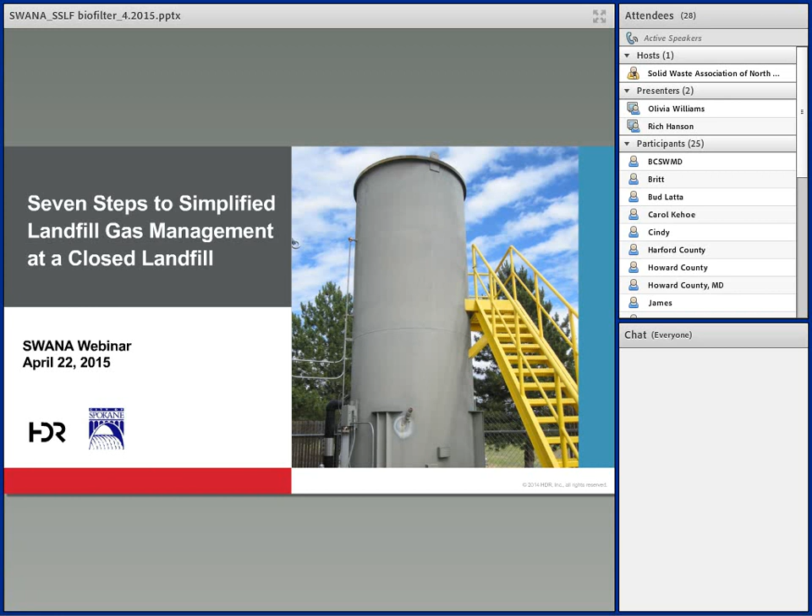Rich and I are going to be presenting to you on 7 steps to simplify landfill gas management at a closed landfill. So what we are going to be doing is walking you through what we call a step-by-step approach, which is just a fun way of kind of sharing a case study with you on the Spokane Southside landfill, which is a closed landfill site in eastern Washington.

So the steps that we're going to take you through today here, Rich is going to give you a bit of a background on the site itself and a project introduction. Then we'll take you through the 7 steps that you can see here on the screen. We started out with an overall audit, then get into some of the details of a landfill gas assessment and the landfill gas monitoring. We'll take you through the permitting and design process and then tell you about the upcoming construction and the follow-up monitoring. And then at the end, we'll spend a few minutes and talk with you about the project as a whole and some of the benefits that we feel that it provides.

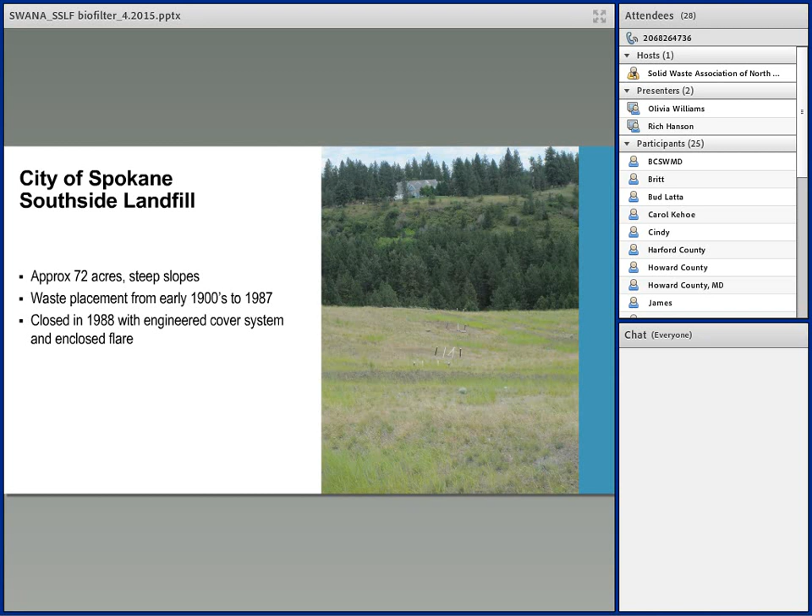Oh, I'm trying to change the slide here. Bottom left. Bottom left. There we go. Thank you so much. All right.

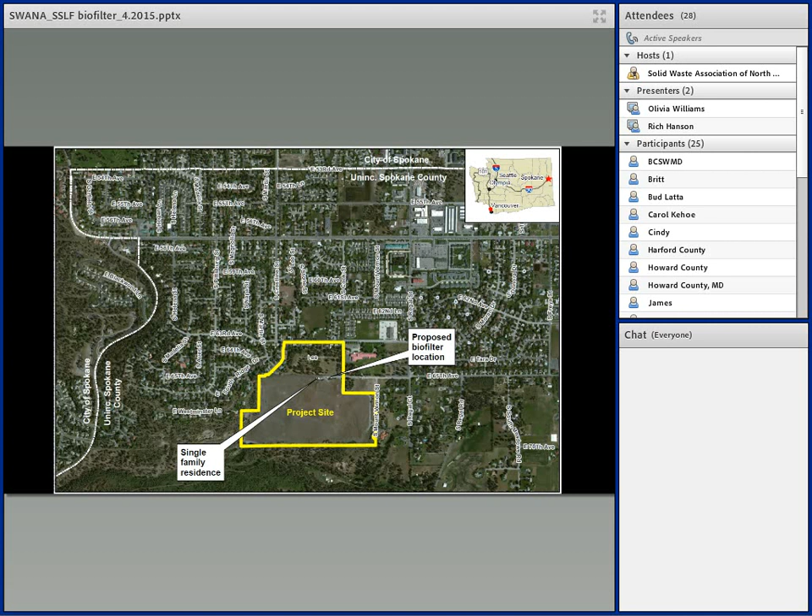The terrain slopes from the upper portion of the picture shown there to the lower portion. And as you get down to where the words project site are, it gets very steep on that end. And so it steeps down into a ditch that's way down back there. The groundwater flows from the upper right to the lower left, as the picture shows as well.

Some of the issues that I was trying to evaluate piecemeal-wise and what caused us to get into the audit included areas where we had large settlement areas that were causing flooded conditions in heavy rain and early spring with snow melt-off around some of the gas collection or gas monitoring points. And in addition, were causing excessive loads onto the cover itself.

The cover that was engineered and placed on here wasn't the type of cover that I see in other places where it's completely welded. This was kind of a slip cover that was supposed to account for the settlement, so they were overlapping, and as the settlement would occur, the membrane would slip across itself to continue that covering. So there's the thought that if we have this ponding occurring in those locations, we could get some surface water intrusion into the landfill. We don't have anything to substantiate that, but it's a possibility that exists out there.

Sags in the gas collection lines have produced blockage from condensate buildup at certain times of the year as well. That has caused the flare to shut down more often when we have heavy condensate being produced in the system. In addition, at the flare, we have a carbon monoxide problem. It's not out in the field.

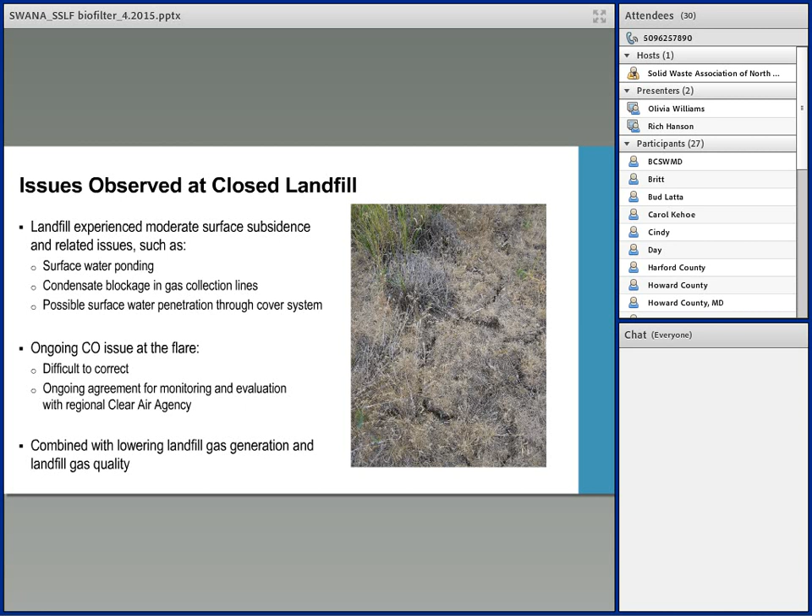And then in addition, it's almost 30 years, and the old school thought was that 30 years was just about it as far as where things would be in an old landfill for having to monitor and operate it. Now, as we get closer to that 30 years, we start to see that that's not necessarily the right solution. So we're starting to work with ways to show our regulators that we're operating in good faith and that we want to try to find some reasonable way to plan out the end of landfill life issues that are coming up for us and for so many others.

So back to the audit, we hired HDR engineers, and they proposed a systematic approach to help us to identify and evaluate the issues. We have 2 technicians that have been with us for a combined 25 years, so that's a lot of experience about handling, operating, maintaining these landfills. And so HDR came in, gathered data, just raw data, and then also interviewed the technicians to find out some other issues that were ongoing from their point of view. And HDR put that together, and Olivia will speak more to this as we go along.

But they put together a way for us to identify items that were in need of immediate repair, some things that could be put off for a few months, and then other things that were more long-term repair. They helped us to evaluate if those repairs could be done in-house or if we needed to bring a contractor in, and then put together preliminary budget ranges for each of those so that we could start to identify a budget item to do these repairs as we went along.

HDR, along the process, came to us and said, hey, we think that you ought to consider going to a biofilter here. It'll remove things like your carbon monoxide issue of having to operate the flare. It'll eliminate a lot of the weekly operation issues and reduce your annual operating costs. Those were all things that were very attractive for us to hear. And so we're very excited to do that. We went and did an addendum to the consultant contract, and they began to do that, and that's what brings us up to today.

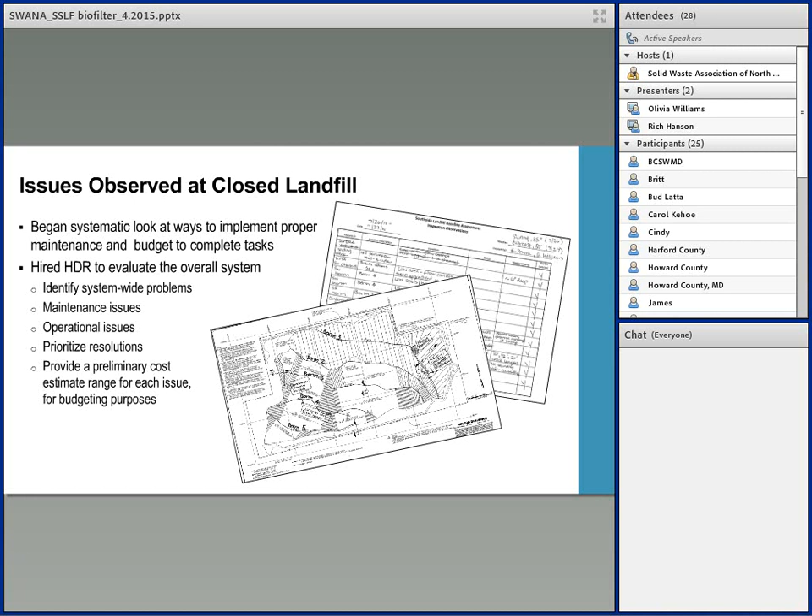So with that, I'm going to turn it back over to Olivia, who I'd just like to say I've had the great fortune of working with on this project since its inception, and so I'm just very thankful that I get to do this with you, Olivia. There you go. Oh, thank you. It's been great, and we'll keep it going.

So to provide a little bit more detail on the audit that Rich described, we joined the project in 2010, and what we're going to walk you through today is really sort of an overall 2-part project. Part 1 was the audit that Rich described, and then as we started honing in on some of these landfill gas issues, we really focused on that biofilter piece, which is the second part of the process.

So as Rich mentioned, step 1 that we recommend in working at an older landfill site like this, especially when you have changeovers in staff and some institutional knowledge that can be lost along the way, is really doing kind of a snapshot audit that gives you a good idea of what the existing conditions of the site are. And as Rich mentioned, that involves looking at the actual site itself, collecting data, but also really hearing from the operators because they are a critical piece of how that site has been maintained over the past number of years. And a lot of the anecdotal stories that you will hear, the data collection, the tweaks to operations and things like that, those can't be observed out in the field. So that's a really critical piece of the audit process.

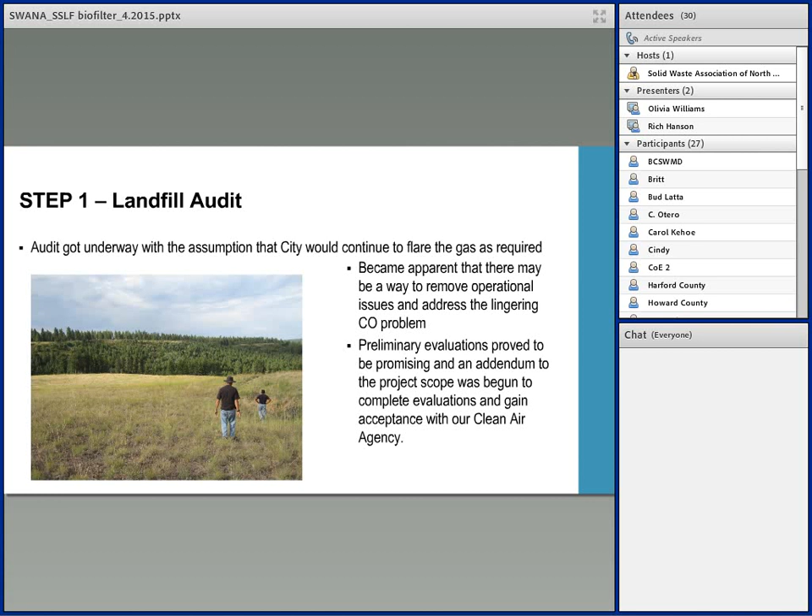So what we discovered as we were conducting this audit is that, as Rich hinted at, there were probably ways that we could look at to streamline landfill gas operations. And so of all the recommendations that we made as a result of the audit, the landfill gas pieces are really the ones that we honed in on. Before we start to focus on those, though, I just wanted to give you an idea of what the results of that audit process looked like, because again, that's really kind of the first piece in evaluating your site conditions.

Rich described some of the issues that had been observed at the site with the stormwater ponding and things like that. So we wanted to make sure that we had a good baseline documentation to work from so that we could come back to that at any point during this project and really recall what the challenges and the issues observed were.

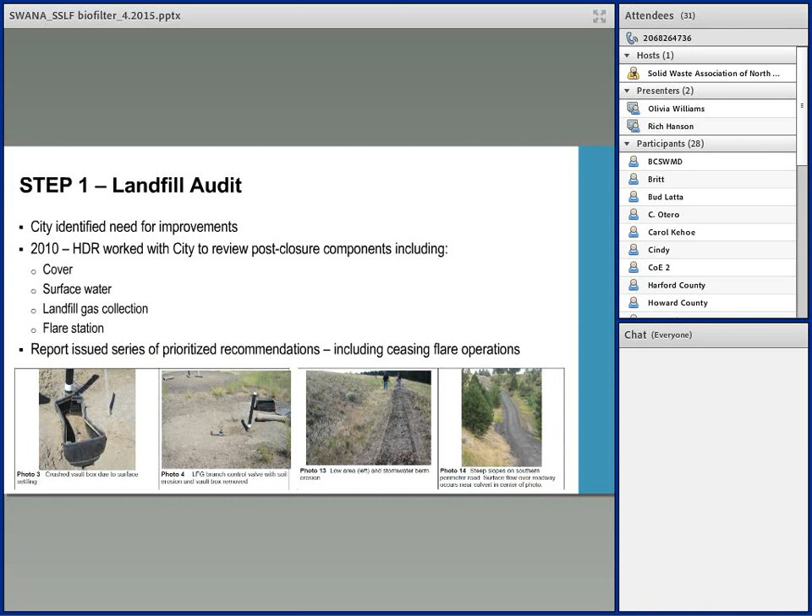So after that initial piece, as I mentioned, we really started to focus on the landfill gas elements in particular because that's where we saw a lot of room for improvements. And as Rich noted, a lot of opportunities for potential savings based on how the existing facility was being operated. So the existing flare is an enclosed flare, and it typically operates between about 450 and 550 cubic feet per minute. But as Rich noted, based on the age of the landfill and the declining quality of the landfill gas, that was becoming a very intermittent operation. So it was only operating between 3 and 5 days per week.

The low methane would cause the system to shut down, and then one of the operators would have to come from the other landfill site to check on that, to restart it, and to collect that monitoring data that Rich described. So in addition to the carbon monoxide that was observed as an issue at the flare, the landfill gas system, including the flare, was being monitored for your standard landfill gas parameters. So those included methane, carbon dioxide, oxygen, your balance gases, and then the overall landfill gas flow and the landfill gas temperature, so that you could keep an idea of the overall condition of the landfill itself as it continues to age.

And what we've shown in the bottom corner here is just a summary of the historical readings that are collected on a monthly basis. We've wrapped those up into an average over a 5-year monitoring period here. So you can see specifically for methane at a concentration of just under 25%. That's pretty low for landfill gas generation and for continuous flare operation. So you can see how some of the challenges that the city was encountering could be happening.

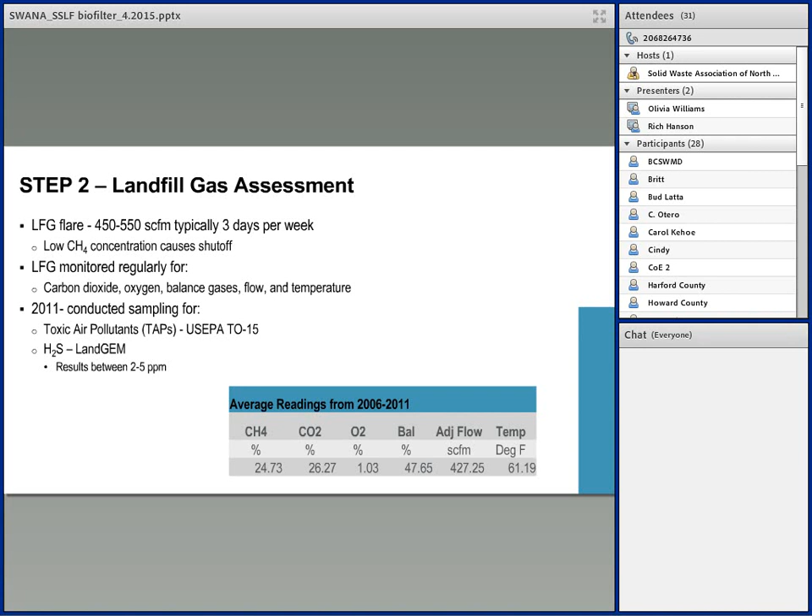Additionally, because hydrogen sulfide, or H2S, is a common odor contributing factor to landfill gas, we also conducted H2S sampling over about a 2-week period at the flare itself, and that was done just using a handheld monitor like you typically use for site landfill gas monitoring. So we observed H2S concentrations between 2 and 5 parts per million. So we conducted this background data in order to give us, as I mentioned, a baseline for how best to move forward with a potential landfill gas biofilter design.

So in order to get to the permitting stage, we knew that we'd need to do some landfill gas modeling with the data that we had collected. So we conducted some landfill gas modeling, and we compared those to the state of Washington air requirements. And so in the state of Washington, there's sort of a 2-stage threshold for air quality emission rates. And so those 2 stages are noted here. The SQERs, those are your small quantity emission rates, and that's sort of a snapshot benchmark. If your anticipated emissions are less than your SQERs, then you're good to go.

However, if you are higher than the SQERs, you can do some additional modeling to determine if the ASILs, or your acceptable source impact levels, will be exceeded. And if you can show that your ASILs will be met, then you are typically able to move forward with the project. However, if your ASILs are exceeded, that's when you need to go back and think about some additional air pollution controls that would help get you under those regulatory thresholds.

So based on the results of the landfill gas sampling that I described in 2011, we identified 2 key parameters that would be an issue for tracking and for permitting with respect to converting the flare to a biofilter. And those 2 major parameters were vinyl chloride, because that came back over the SQER levels, that initial threshold that I mentioned, based on the TO15 sampling, and then hydrogen sulfide that we monitored in the field.

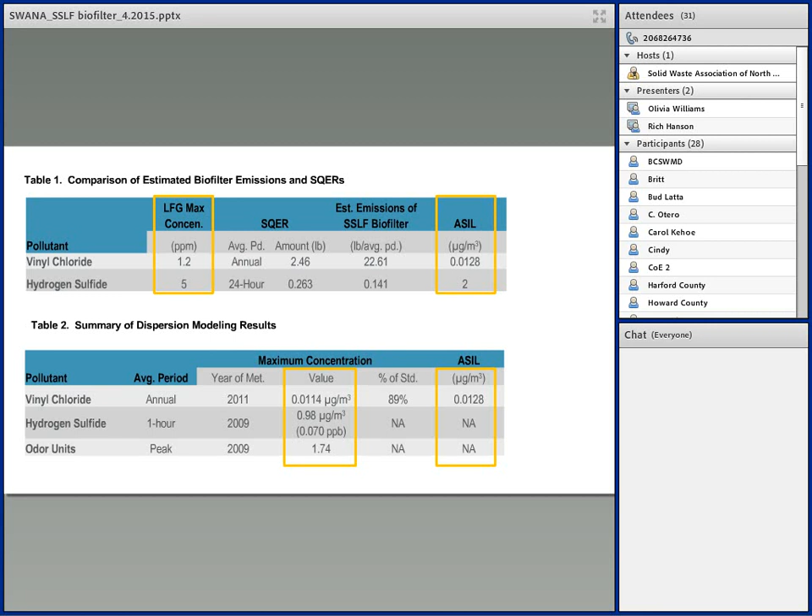However, because the concentration for vinyl chloride is now well under that ASIL threshold, we felt comfortable making the recommendation that this was an appropriate technology to use and that there would not be any adverse impacts based on modeling the vinyl chloride. Now, as I mentioned, we also wanted to consider odor when we were modeling this technology as well. And typically, minimum odor thresholds for an average human being to detect an odor are between 5 to 10 parts per billion, or what are called odor units.

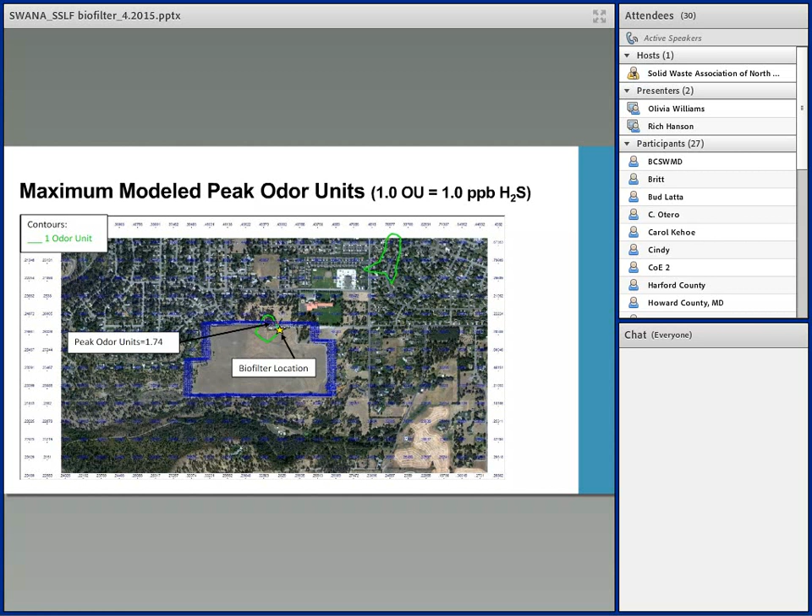So that got us through a major step in the design process. And moving on to the next piece, again, we were evaluating landfill gas collection and flaring as a whole comprehensive system. So we talked about the flaring piece. Now we wanted to take a closer look at how the site was monitored by the city.

So the existing landfill gas collection system at the Southside Landfill includes a series of internal wells and trenches for collection. That's piped to a landfill gas blower and then to the flare. And then additionally, for monitoring, there are a series of 68 landfill gas probes, primarily on the north side of the site. And those are grouped in collections or clusters of wells that are monitored at different depths so that you can see any landfill gas impacts in the different soil strata outside the landfill.

Additionally, a number of years ago, the city had a potential concern for some off-site migration of landfill gas, primarily on the northeast part of the landfill. So 22 extraction wells or vacuum wells were installed along the northern boundary of the landfill, outside the waste, but they essentially created a cutoff trench to collect any landfill gas before it migrated off-site.

That system operated for a while, and then when it was determined that it was no longer necessary, those extraction wells were shut down. But the city continued to monitor those just to make sure that they were doing their due diligence and observing any potential issues before they arose.

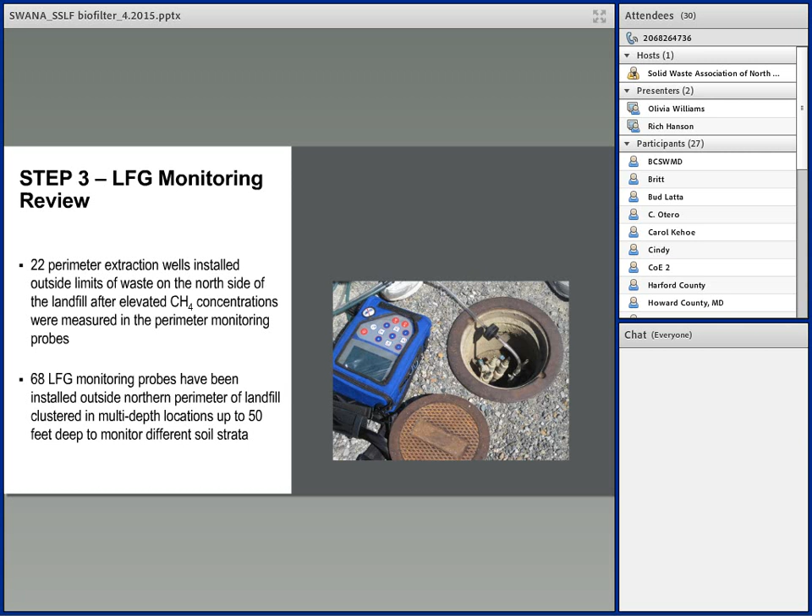So this was quite an effort for the landfill staff to go out and collect this data regularly, especially, as Rich noted, with folks coming from the north landfill site, to do this on a monthly basis was no small feat for the landfill operators. So what we did is we worked with the city to go back and we reviewed the permit conditions. And the permit conditions actually noted that the monitoring needed to be conducted no less than quarterly.

So as the previous landfill gas issue arose with the potential migration, the city had stepped up their monitoring and were doing that on a monthly basis. But after that issue was mitigated, the frequency was never reduced. So in reviewing the permit, we went back and noted the quarterly monitoring requirement, and we made the recommendation to the city essentially to reduce their frequency from monthly to quarterly. So you're going back from 12 monitoring events per year to 4, which could significantly reduce the amount of labor associated with your landfill gas monitoring requirements.

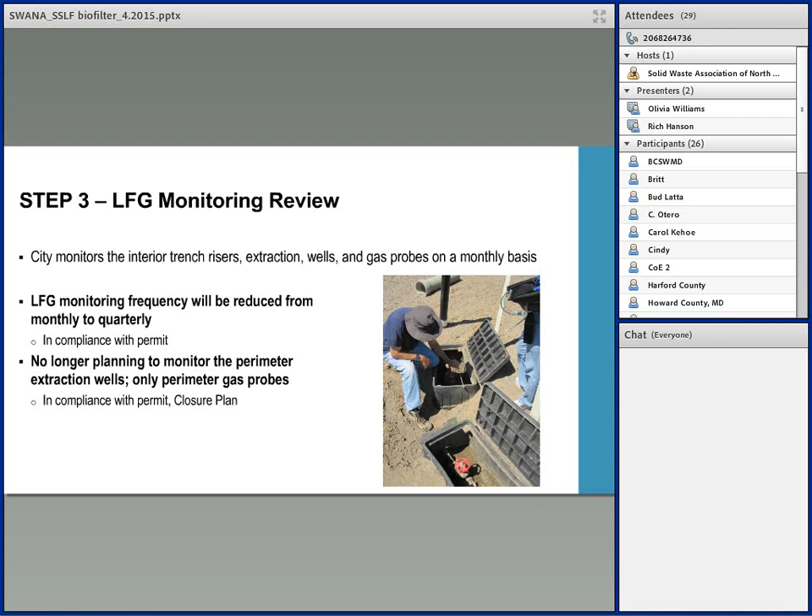Again, it was a good idea in doing the city's due diligence when that potential migration issue was occurring, but after that was mitigated, there was no real driver to go back and monitor those wells anymore, especially considering that monitoring was not their original purpose. So the combination of those two significantly reduces the amount of operator labor required to monitor the landfill and the landfill gas system each year. So we've provided notification letters to the Clean Air Agency. Again, because we were in compliance with permit conditions, we didn't ask permission, but we provided notification that the monitoring conditions at the site would be changing.

So the next step was the permitting process. And in the state of Washington, the local Clean Air Agency requires what's called a Notice of Construction, or an NOC. That's essentially the permit for any new air pollution control equipment. So similar to an industrial baghouse or to a scrubber, installing the flare, or now this proposed biofilter, is considered air pollution control equipment. So we needed to go through this permitting process to get approval to construct the biofilter.

Now, we walked through the technical process behind the biofilter with the Clean Air Agency, and fortunately, it was a process that they were familiar with because they had actually permitted a similar project in eastern Washington a couple of years before. So this one that we're working on for Spokane is the second one in the state.

The general thought, or the general technical process behind the biofilter, is that it's oxidation of landfill gas instead of thermal destruction of landfill gas, like the flare currently does. So the combination of the methane, the oxygen, and then the nutrients that's in the biofilter material breaks down the landfill gas into harmless constituents. So you get what's called a biomass, which is your biological result of the bacterial process, and then you break it down into carbon dioxide and water. So it's a fairly straightforward chemical process.

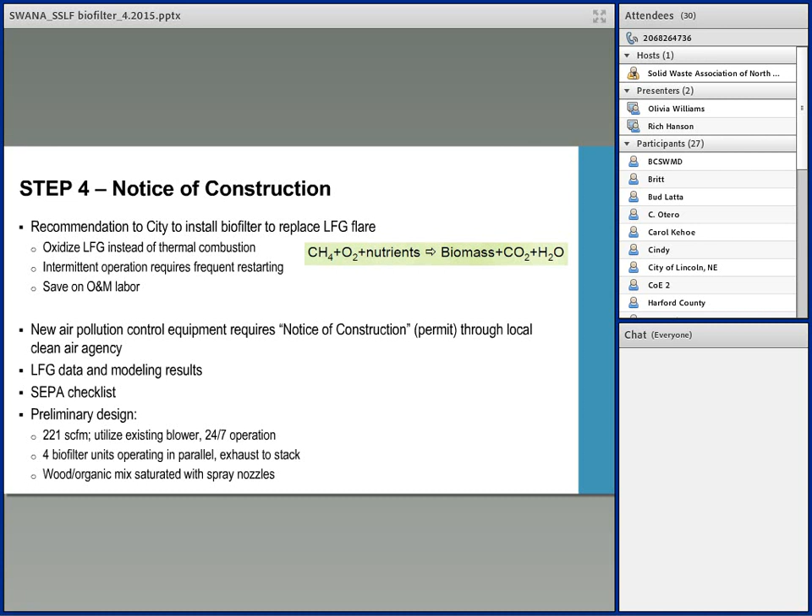The original vision was that we would have 4 modular biofilter units operating in parallel. That way, if you needed to replace the media in one, you could have one down while you're operating the other. But you still get the appropriate surface area needed to provide the biological treatment of the landfill gas. And then those 4 biofilter units would have the treated gas collected, and then they would exhaust to a stack, as I mentioned, for purposes of the landfill gas dispersion.

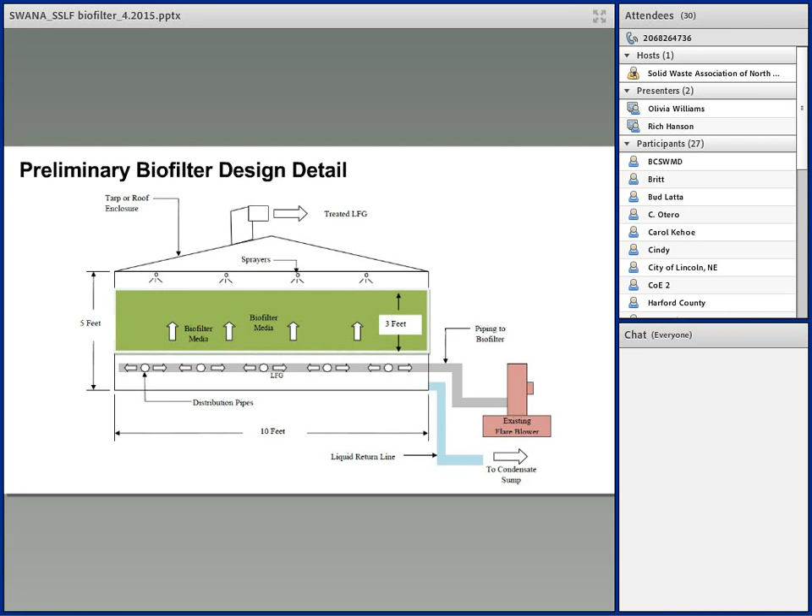So once we made it through the notice of construction process, we got approval from the Clean Air Agency to move forward with this project, and we started to delve into some of the design details. So as we called around and spoke with some different vendors about potential modular units, we discovered that there are a couple of vendors that use roll-off boxes that are typically used for solid waste and recyclable collection and hauling, that have converted those into modular biofilter units. So in looking at the sizes available of those, we optimized the 4 biofilter units that we initially proposed down to 2 units, and those were 2 27-yard roll-off bins. So we were able to provide the same depth of media, and we were able to provide the same surface area required for treatment, and the target parameter there that we were looking at was what's called the residence time.

That's how much contact time the landfill gas has with the biofilter media itself to allow the bacteria to break down the constituents in the gas. So we were able to convert and streamline 4 units down to 2, which saved on the overall material pricing for construction as well as the overall footprint of the anticipated biofilter unit.

The media itself we anticipated, as I mentioned, to be wood chips and green waste, and because the city operates solid waste operations throughout the city, that's something that would be readily available to the city. So that was a nice opportunity to be able to utilize existing materials.

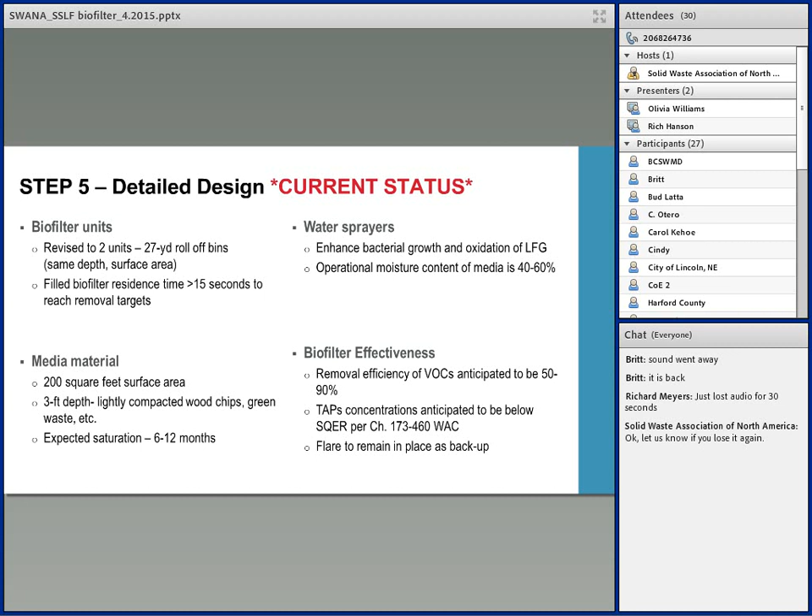It's important to note that it's not an airtight and watertight system, so these biofilters will need to be located on a concrete pad to collect any leachate or drainage that does escape the biofilter unit. But this does do a good job of trapping the majority of the landfill gas that's through the media and then routes that to the collection points that we'll see on the next slide here.

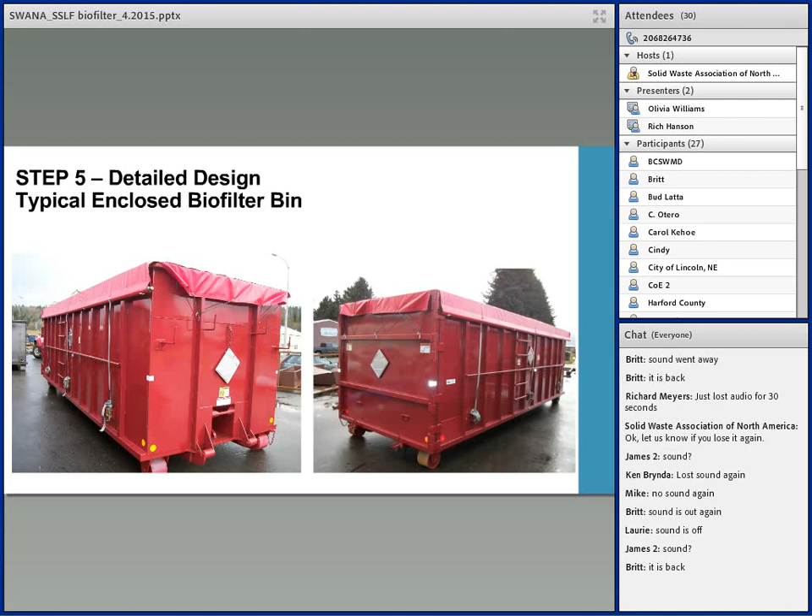On the right hand side, a bit tough to see, but you can see that there is a door that swings open. So if need be, you can check the status of the media there. You can use that as an access point if you need to swap out material, etc. So there's a couple good access points, and the idea of these biofilter units is that they're pretty easy to swap in and out.

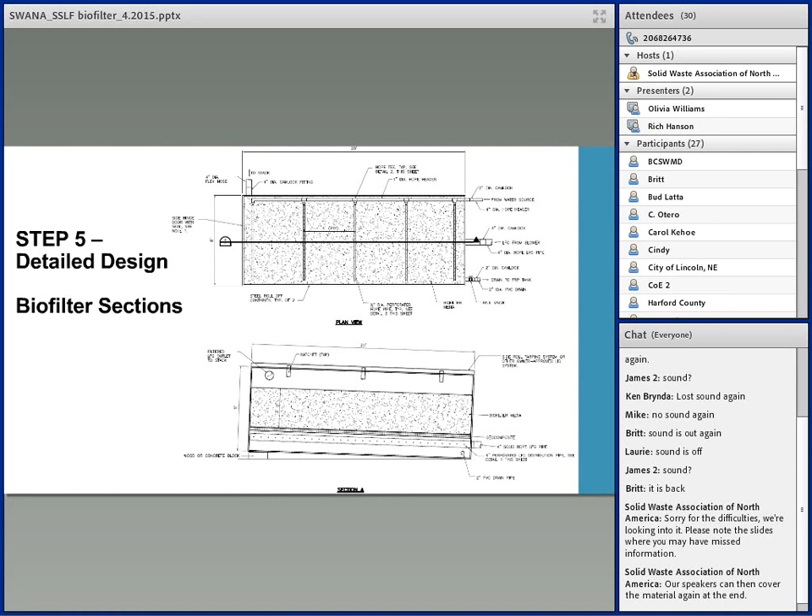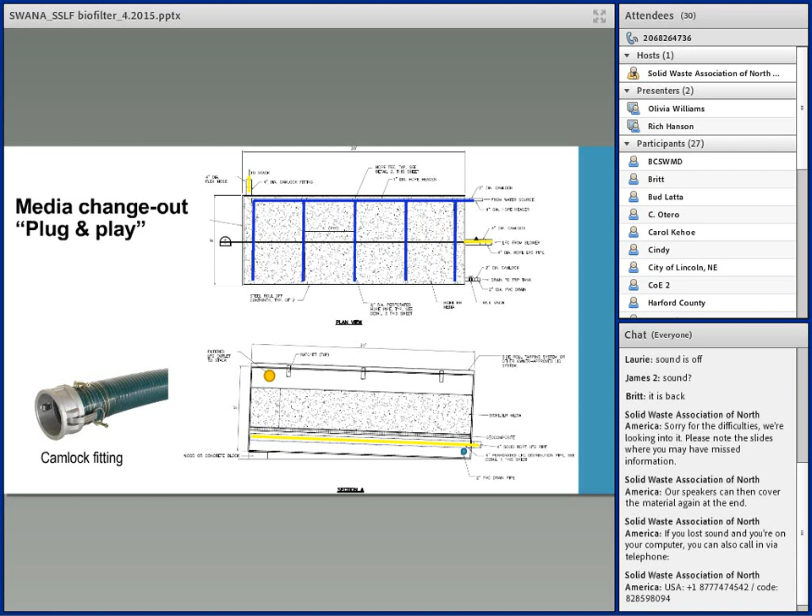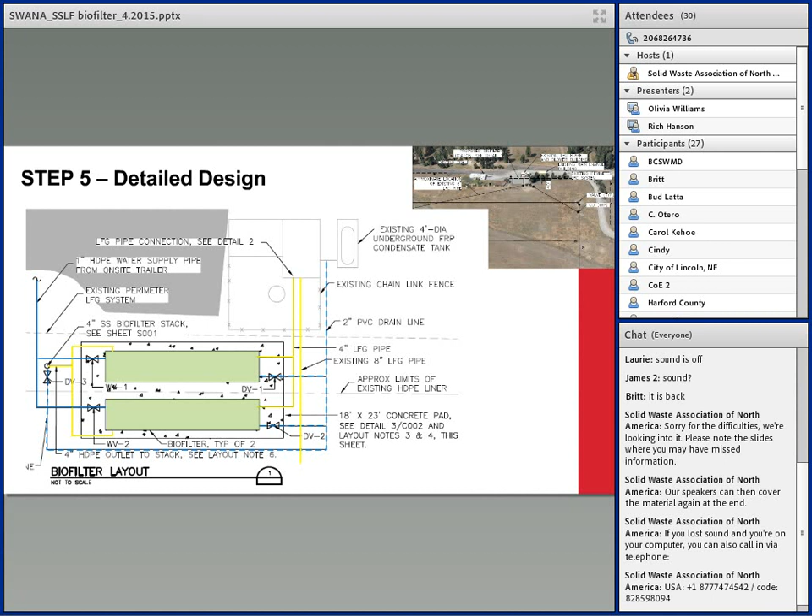So as I mentioned, task 5 or the design phase is where we currently are in this overall project. So the next step would be to construct this biofilter system, and that is anticipated for sometime this calendar year. Because the units are modular and the city has already gone ahead and procured the actual biofilter roll-off boxes themselves through an existing contract, we anticipate that construction for this would be fairly straightforward and could be done in about a 2-week time frame. So we've put together our engineer's cost estimate for the various pieces of the project here, and we anticipate that the capital cost for installation of the biofilter is on the order of about $84,000.

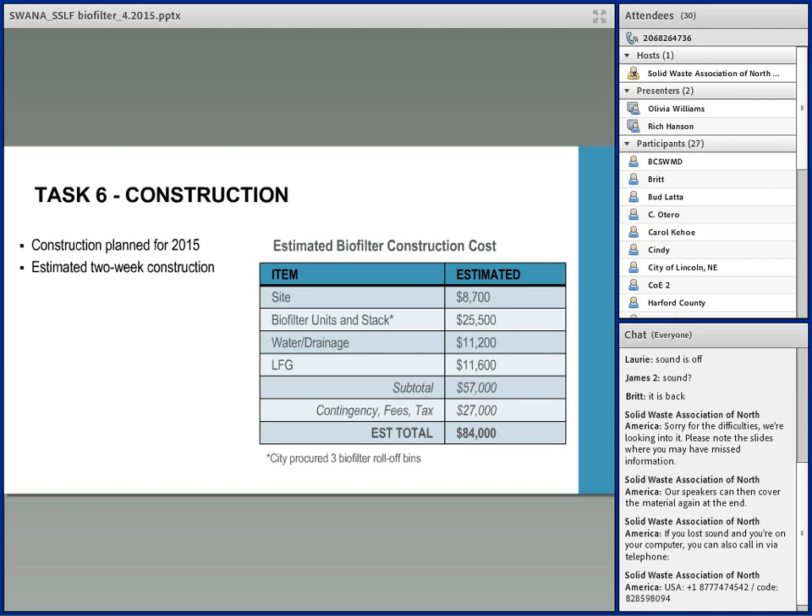So the final step, once the biofilter is constructed, is to do the follow-up monitoring. And this is important so that we as designers have a good understanding of how the facility will operate. It's also important to the city and to the Clean Air Agency to make sure that this biofilter technology is appropriate for the application. As Rich mentioned at the beginning of our webinar here today, the site is nearing the end of its post-closure period, and so we would like to do what we can to help the city minimize and optimize the operations required on site to eventually be able to prepare the justification to exit the post-closure period.

So within 30 days of startup of the system, the Clean Air Agency has required that we prepare an operations and maintenance plan. And as with many projects, but especially ones associated with landfill gas where the anticipated results are not as predictable as you'd always like, it'll be very helpful to have this 30-day period to be able to work through some of the tweaks and some of the startup challenges that may occur in putting in this new technology.

So that O&M plan will require that the city does regular monitoring of the biofilter system for the temperature, the moisture, the pH, and the pressure drop across the biofilter. As I mentioned, the temperature and the moisture are key parameters in making sure that the biofilter is operating under that optimal condition where your bacteria are really breaking down the landfill gas. The pressure drop across the biofilter helps to note if there's any clogging or will help track that saturation period that we talked about earlier. So as you note that your pressure is increasing, you're getting to that point where your landfill gas treatment is not effective.

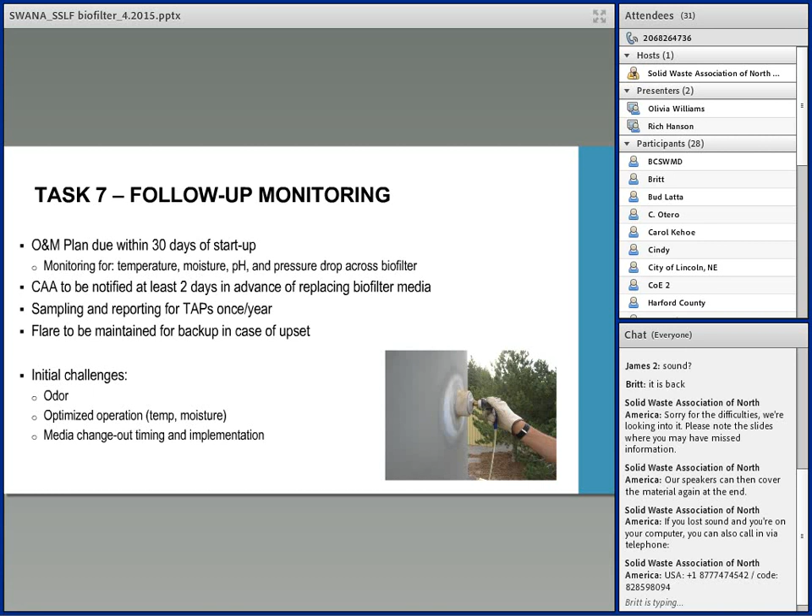We joked around a bit at the SWANA conference about a potential step 8 in this presentation too. Someone asked about carbon credits, and that's not something that we had considered thus far as part of the project. We were really focused on the permitting and the implementation. But going back and looking at the carbon credits associated with not flaring the landfill gas is something that could really provide value to the city of Spokane at a higher citywide basis. So that may be something that we look into once we get this biofilter well established.

So in closing, we have some final thoughts for you about this particular assessment and technology and how it might apply to different sites around the country. Based on the anticipated labor reductions that we foresee as part of this project, we talked about reducing the monitoring frequency as well as reducing the monitoring locations. And then additionally, we anticipate benefits in not having to have a landfill operator come out to the site each week to do the CO testing and to restart the flare.

We anticipate there being about a $24,000 per year savings in labor by installing the biofilter and not having to monitor and maintain the flare. Based on the anticipated construction cost, this would mean a payback period within about 4 years, which is not too bad. That really helps strengthen the argument when you're talking to management, to regulators, about the benefits of this project. And again, it's a lower maintenance operation, which will help them take one more step closer to exiting that post-closure period eventually.

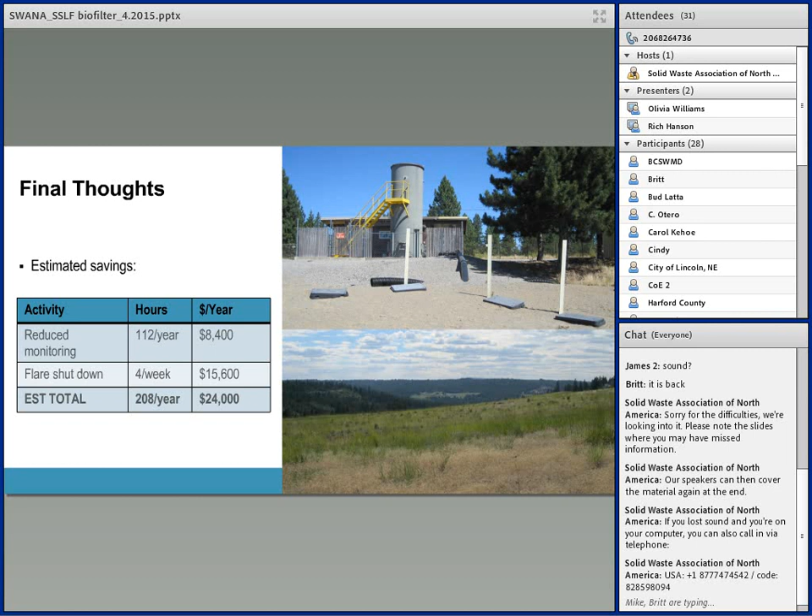And here's some kind of overall summary thoughts that we had, again, as I mentioned, in application potentially to other locations. Similar to a lot of other closed landfills, closed doesn't mean forgotten. With closed landfills, especially ones that are a little further away than an urban core, the tendency is to sort of be out of sight, out of mind. But as Rich noted at the beginning, there are a lot of environmental considerations that still need to be managed.

We talked about the surface water. We talked about the settling and cover conditions. Leachate and groundwater are issues at a lot of closed landfills. And, of course, as we talked about today, landfill gas. So just because it is not accepting waste doesn't mean that there aren't environmental considerations that need to be developed or maintained. One of our key recommendations in working through this project thus far is to really utilize existing resources. Lots of times we think about resources as being materials or equipment, and those certainly were resources that we were able to capitalize on through this project.

We talked about the biofilter media itself and the roll-off boxes being procured by the city directly. We talked about some of the infrastructure, the condensate tank and the blower from the current system being utilized. But what we really felt was one of the strongest existing resources that we were able to utilize on this project was the people. Specifically, the regulatory agency. We worked hand in hand with them through both the design and the permitting process.

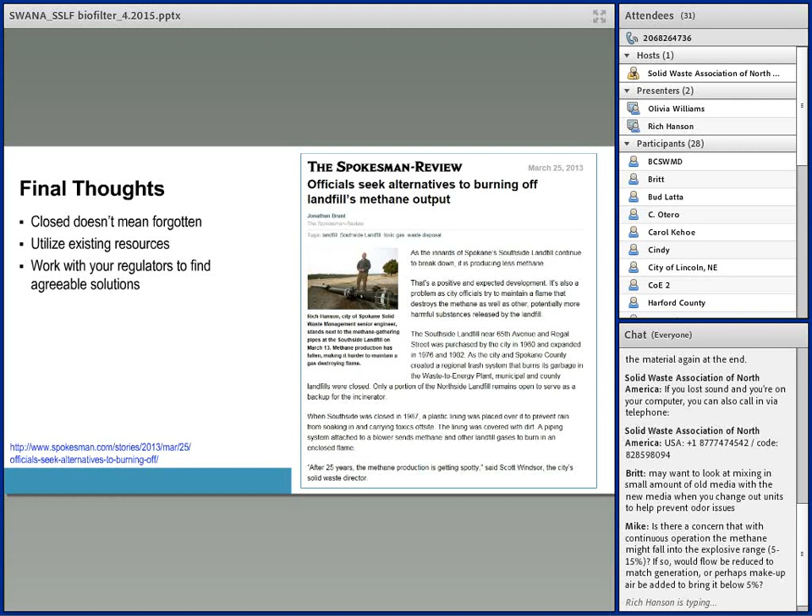So utilizing both physical resources as well as people as resources was something that really helped this project be successful to date. And that goes hand in hand with the last bullet that we have shown here. Lots of times in solid waste projects and other projects as well, you consider your regulators to be sort of an independent third party that you have to appease. You come up with the design, you throw it over the fence, you receive comments, they throw it back. But we really gained a lot and benefited a lot of good value in working hand in hand with the regulators to help develop this project. So that's an approach that I would certainly encourage based on our experience thus far.